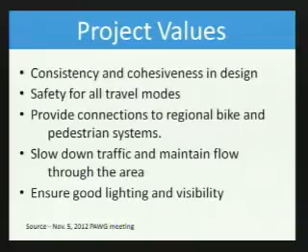And for those of you who weren't here, are there additional values you would like us to make note of? Because what will happen is this list, as well as project constraints, which we're going to talk about in a moment, also will be given to the PSU students so they know what constraints they have to work under, and then also what their work needs to reflect as far as community values. So I'd love to open it up to you, especially those of you who were not here or those who were here and had some additional ideas they'd like to add.

I don't see it specifically here, but I read in the notes that greenery and landscaping was part of the goal as well. Yes, I think there's something about natural elements. Put landscaping, green. Okay, I see, incorporate natural elements. Okay.

As for how this will be presented, prior to the design competition there'll be a design brief written, and all this will be included in that. So when the students see that, as well as come and visit the site, they'll have some pretty well-defined parameters. They'll be designing not only to the physical constraints and ideas, but also to your values, keeping those at the top of mind.

I note that the point here of slowing down traffic and maintaining flow through the area concerns me a little bit. I know we have the traffic speed set at, let's say, 30 miles an hour as you go through the prime part of Oregon City on McLoughlin. What are we doing in addition to that?

Unless you want. All right, so we do have a few project constraints, as we always do. One of our first criteria for this project is we were not to impact or take any right-of-way. We may end up with a couple construction easements to build the project, but the intent is to not purchase any new right-of-way. So we'll work within the confines of ODOT right-of-way and the city right-of-way.

Some of our kind of threading the needle through this project, we have two bridges that we are not widening or adjusting in any way. We basically have a set roadway width that we have constrained by these two bridges. So widening the roadway is kind of out because we'd have to kind of taper it back down and then taper it back out again.

A couple of other things that we have are just grades on this project. As you all know, as you come into the city, it's basically like a levee road with the slopes dropping off quickly to each side. And the primary reason for that is the 100-year floodplain is about the curb height. So any work that we do outside of that area, we have to mitigate for. So if we widen the project out and we fill in that 100-year floodplain, we have to excavate somewhere else to kind of balance that so we don't make the Willamette River rise during that 100-year.

But we've put together, laid some lines out right now and put together a good preliminary design that kind of fits within this roadway area. We're looking forward to developing the ideas, and I'll kind of go through and explain some of the standards that we have to follow.

Traffic calming came up, and one of the ways that we do it without actually reducing the posted speed limit is narrowing the lanes, which we have. ODOT's been on board, and trucking has been on board as well. We're going to reduce the lanes to 11 foot, similar to what we did on the first phase. Shy distances, usually at this speed, we're required to put 2 feet in. The shy distance is just that distance from the curb to the lane line. It gives a driver a little more comfort. Take away that comfort, and the driver tends to naturally slow down.

Street trees, that's probably going to be our toughest sell with ODOT. They are an obstruction that if a car hits, the tree usually doesn't yield. So, but it is one of the number one traffic calming measures. It creates a kind of enclosed tunneling effect while beautifying the area, but it causes the driver to slow down again because of just that sense of things that are around them.

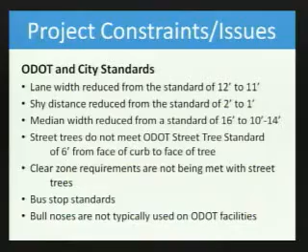A couple of other elements that we'll be adding in there is the bull noses. We're going to look at that. Typically not in an ODOT standard, but it does have its purpose. We have that on the first phase. Kind of gives that pedestrian a little refuge there to feel a little safer. It gives the cars - it's more of a target, but the car would hit that before they'd hit a pedestrian. So it's just one extra sense of safety for the pedestrian to cross.

And then, of course, the bus stops. We have been in contact with TriMet. We've been looking at just their facilities, seeing if there's any other places that it could be moved to, or a little bit down the road, or if there's any better function for it to better serve the community and create a safer mode of transportation for all.

We've got a couple design concepts tonight. The project prospectus is what this project was funded by. It's just the package that was submitted to ODOT for their approval, and securing the funds for this. It by no means is the be-all, end-all design for this project.

In a minute here, you'll see the proposed design that we've come up with that we would like to move forward with pending ODOT approval. I know it's kind of small and the color's probably not the best, but basically the project goes from the Clackamas River Bridge to Dunes Drive.

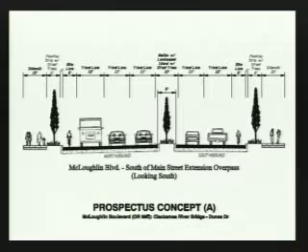The big thing to point out here is the bike lane on the road. We've increased it from 5 to 6 feet, just for a little bit extra safety here and here on both sides. And then we have the wider 10-foot sidewalks on both sides. That is pretty much the section throughout the entire project.

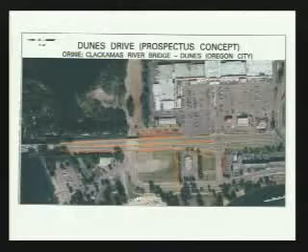One kind of area that the architects are going to look at is here. We kind of got this big hatched area - I'll call it a plaza for lack of any imagination, but that could be a plaza area that will be open for discussion with the architects and what could go in there. Just a wider area there. I think it's a great place for it.

We've got buses and bikes and peds all kind of coming together on that corner. We're looking to widen that area there. But there's elements I'm hoping that the students touch on - there's an element here, and they can work in that one corner there. Maybe create a safer area to stand by, or just something that's nicer to look at.

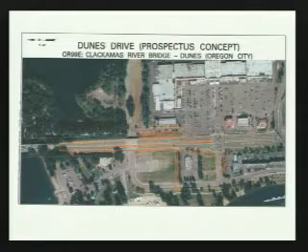One of the things I want to point out is we're looking for some pedestrian connectivity. We've looked at, it's just the design team looking at different elements to see if grades work, see if people come up with ideas. We're trying to kind of look around the project and see what we can incorporate into the design. One of them would be just a pedestrian walkway down from the roadway and then possibly down into the waterfront there.

That's about it for this. I'm going to move on to the next concept, which is our proposed design. Let me go back to pros and cons real quick.

Really, the two pros for the bike lane on the road is it gives a little more room for the water just to build up during a rain event, so it gives it more spread before it collects into the inlets, basically creating an area where the cars won't hydroplane. It just gives it a larger collection area before it dumps into the inlets. Another advantage is it keeps them further away from those street trees. ODOT has a general guideline that says the curb face should be 6 feet from the trees. That bike lane creates an additional 6-foot buffer, helping with their clear zone rules.

Some of the cons is it keeps the bikes on the road. As you saw in the picture and as we've talked to different people, the bikes stay on the sidewalk in this location for several reasons. A large part of it is just a high-speed moving corridor with lots of signs overhead, and they're not paying attention to necessarily everyone on the road other than just where they're going.

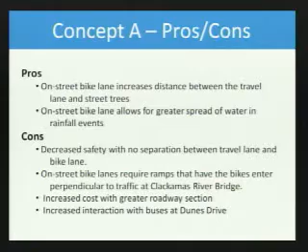The bikes are guided onto the bridge, so there is a ramp on both sides. It kind of aims the bikes right perpendicular to the roadway, so they have to maneuver somewhat not in a safe fashion and then get into that bike lane. So the bikes are on and off of the sidewalk at that bridge, and we're trying to make, in our option, kind of a safer mode of transportation.

In our Concept B, which we're calling the separated bike lane concept, at this scale it's hard to see, so I'll go straight to the section. Everything pretty much remains the same, with the exception of the outside lane. The 6-foot bike lane goes away, and that outside lane goes from a 12-foot to a 13-foot. Essentially, it's an 11-foot lane with a 2-foot buffer.

It's exactly what we have on Phase 1. As you go through those barriers, you'll see the 11-foot lanes with the 2-foot stripe right next to the barrier. We've got the street trees in this, and the main change is, again, pulling that bike lane off and giving it its own bike lane.

So you can see here we've got an area for bikes and for bikes here and the sidewalk. The idea is to stripe that as a bike lane so it keeps the pedestrians off, theoretically. But essentially it gives the overall use of all the pedestrians a 14-foot area away from traffic. The pedestrians and cyclists don't have to worry about the cars, and the cars don't have to worry about them. This is a corridor for them to move.

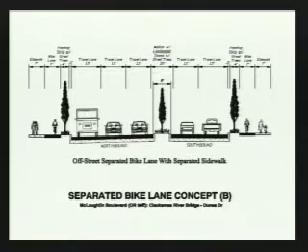I like the idea of this as well, just because the 13-foot lane gives that traffic calming measure. If you've got that extra 6 feet, whether it's a bike lane or not, as a driver you've got a nice big 18-foot lane to speed through there. With the 13-foot lane and the trees, it really closes that roadway in and slows you down.

Let's go through some of the pros. Again, this is really just flipping the pros and cons from the last one. The pros for this is basically safety. It's pulling those bikes away from the motor vehicles as they're traveling through, looking at the signs, trying to figure out where to go, and moving quickly.

This is one of the biggest challenges on this project and the biggest difference from our first phase: the speed limit. We had 25 and 30 mile an hour speed limits in the first round. This was a special transportation area. This section of roadway is not. It's 40 miles an hour, and there are no special safety requirements on the books.

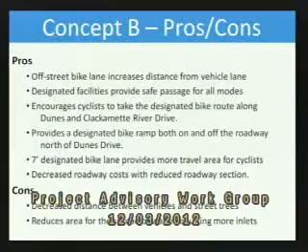So we are trying to produce a roadway section that creates a safe mode of passage for everyone, while we will have to be writing several design exceptions through ODOT to create that. It's going to be a tough process, but I think it's well worth it, and I think it creates a road that will be safe not only for pedestrians and bicyclists, but also for the cars.

We don't want to take away from the capacity of the roadway. We don't want to take away from the maneuverability. Basically, we want to maintain the same traffic volumes, but in a safer manner.

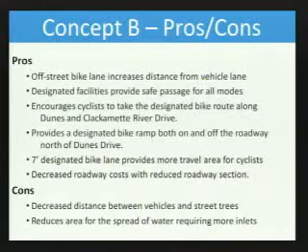Again, part of the decreased cost is we get a narrower roadway width, and it's much cheaper to build a bike path than it is a roadway section. A bicycle lane on a roadway requires a full depth section, which is a bit more expensive.

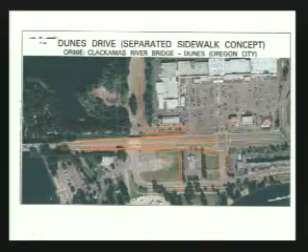Scott, I think too, activating pedestrian activation of that side of the building opens up a lot more uses along that side. Whatever a developer would like to do, I'd like to leave that up to the developer to make their own choices of what fits their design criteria.

Another reason for pulling a lot of the peds and bikes—once they get in here, they can go onto the bike lane and bike path. The peds, this sidewalk ends right here. There's really no sidewalk as you connect. This is very steep, it's got a guardrail here, and it's very steep down.

Making an actual ped connection or any type of connection here isn't an option. We just get too close to the ordinary high water, which is a no-no on this project. The other thing is the grade difference is the greatest right here; it actually comes down to about level over here.

Definitely open—this was just thrown in there right now. It's got retaining walls on both sides to lower the impact to the city property and take away any property impacts to McDonald's. As far as the staircase goes, we have that shown in there. I don't know if it's going to fly with ODOT yet, it's right there. But we do have that—it was another goat path that we saw, and we're showing stairs right now.

Now, one of the things we've looked at is accessibility for ADA. Obviously stairs here and here don't provide that, but this ramp moves across the sidewalk, and we could look at options of putting a crosswalk here, something for safe passage until they get onto the path.

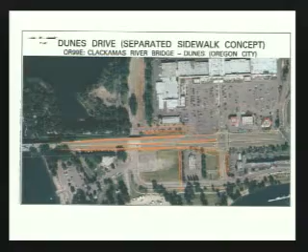A lot of the water we're capturing in this swale comes out of this area. As part of the stormwater retrofit program that ODOT is funding, it's closing off all of these inlets, and all that water is going to run down this swale and out the outfall it currently goes. It doesn't mean there won't be anything done there in that right of way - it could be planted. It's a natural waterway, a low spot, and all the water goes across the culvert there and into an inlet right there. What that's going to look like after this project, I'm not sure yet.

I think with the students' design, they'll take functional elements like stormwater and create something unique with them. You've seen stormwater facilities that have been made into more architectural elements that actually activate.

My concern was that we were giving the impression that piece could not be developed because it had to be used as a bioswale. So if you're moving things over, I'm hoping that will be a developable piece of property. I don't know if it can be, but our project won't preclude that. After this project, it would continue to be city right-of-way, public right-of-way. Whether it would be vacated in the future is a possibility, but at the end of the project, it would continue to be public right-of-way.

There was talk about taking the driveway away from McDonald's. This time it's staying there. Another reason for moving the swale across the road was that with that big hump, so to speak, it doesn't really make for good water passage.